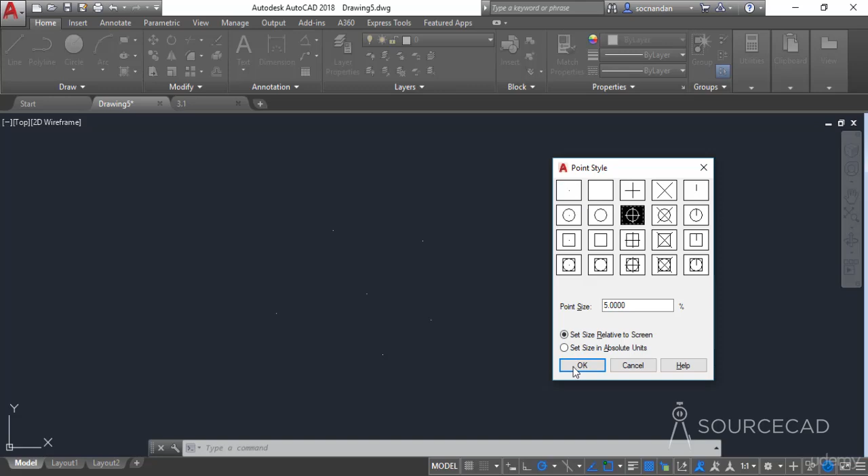Now we have a couple of points here in the drawing area, but they are very small, almost the size of a single pixel, and not clearly visible. In order to make them visible, you can change their style or type using the PTYPE command. Let's type PTYPE on the command line and press enter. This will open the point style window, from where you can change the type of point. Currently we have the single pixel type selected. Let's change it to this one and click OK. Don't change any other variable, simply click OK. Now here we have the different point styles, and they are quite visible.

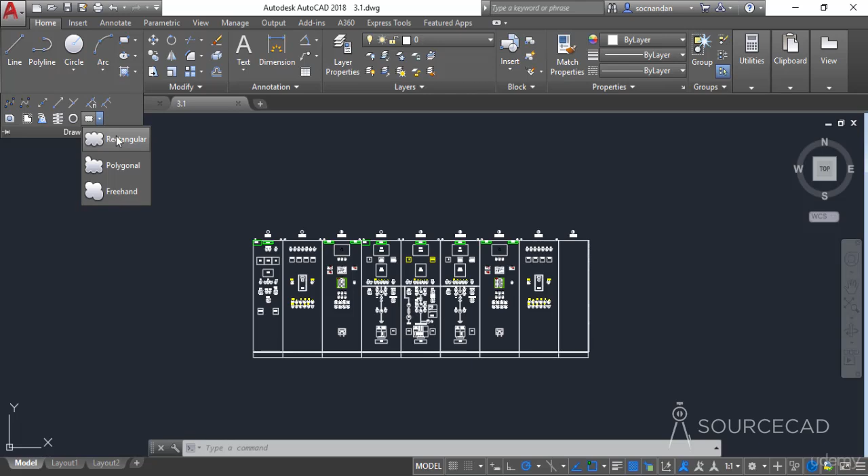Let's now move to revision clouds. Revision clouds are geometries used in the drawing to indicate revision areas. In AutoCAD, you can make a revision cloud in a couple of different ways. Here we have the rectangular, the polygonal, and the freehand revision cloud. You can use any of these options. I'll start with the rectangular revision cloud.

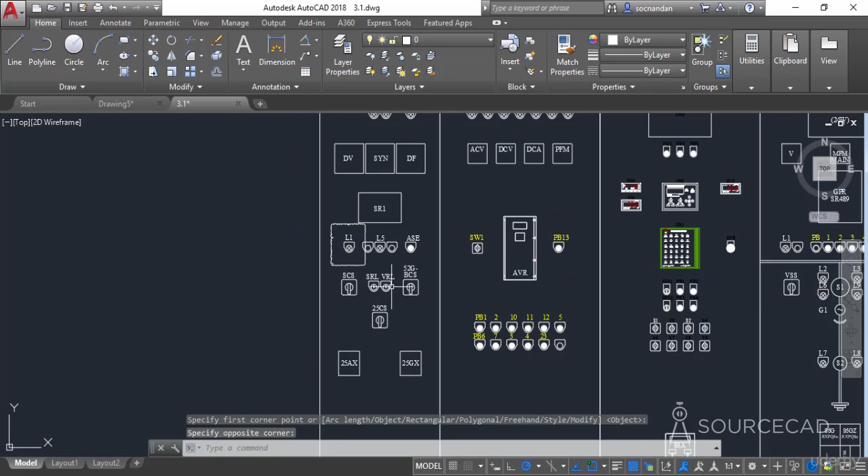Let's select it. Now let's say we want to make a revision cloud over this area of the drawing. I'll click at this point and make a simple revision cloud just like this. So now we have this revision cloud, although the arcs are very small, which we'll also take care of. After adding the revision cloud, you can add any note. In this case, the arc length is very small, so we need to modify it.

Let's do this with another revision cloud. I'll click on this draw panel to expand it, select the revision cloud, and now look at the command line. Here we have an option of arc length. Let's select it. The minimum length of arc is set to 0.5, so let's change this value to 2 units, and specify the maximum value as 5, then press enter.

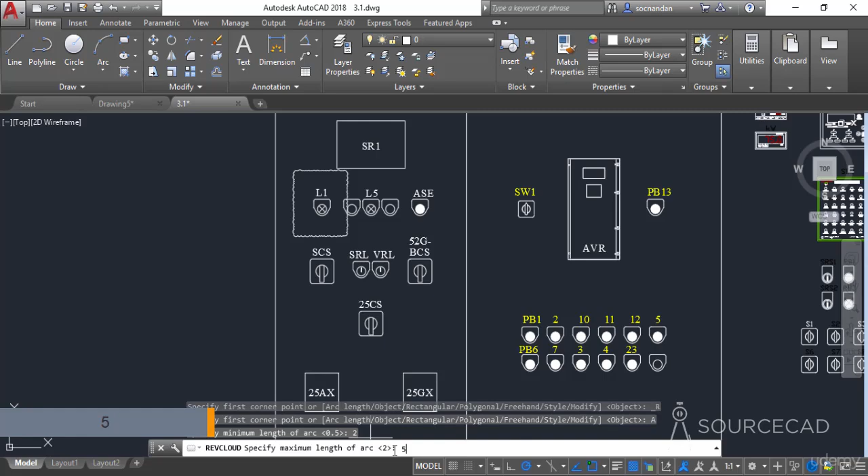Now we'll make another revision cloud. Let's click at this point, and now you can see the clear difference. The arcs in this revision cloud are quite visible, with the minimum size of the arc at 2 units and the maximum size at 5 units, as we specified.

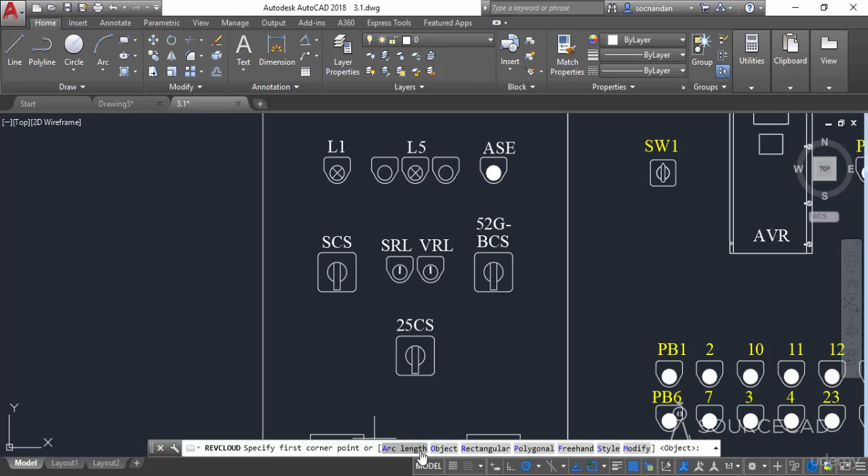Let's now erase both of these revision clouds and look at other options of revision cloud. I'll go to the draw panel again and select the same revision cloud option. Now here we have some other options. For example, we have the rectangular, which we've already seen, and we also have a polygonal revision cloud. Let's select this polygonal.

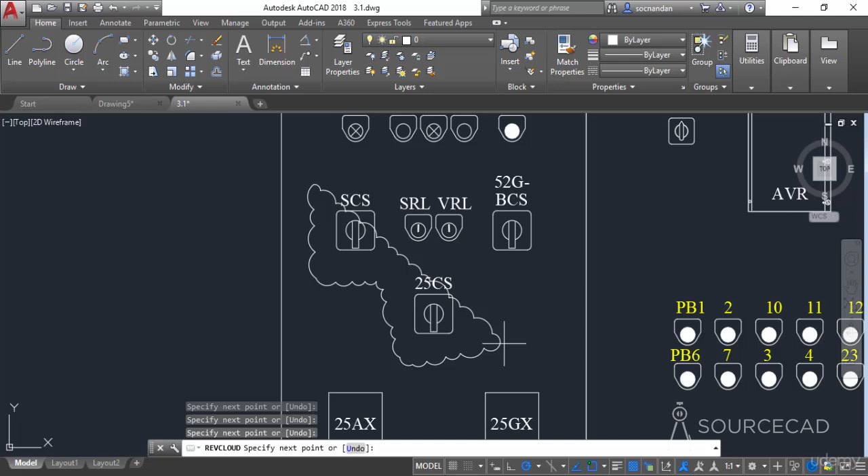Now let's assume we want to include this object and this object in our revision cloud. For that, we can make a polygon just like this. Click at a point here, now click at this point, then this point, to make a revision cloud that includes only these two objects. In this way we can make the revision cloud. Now press enter, and here we have the final revision cloud.

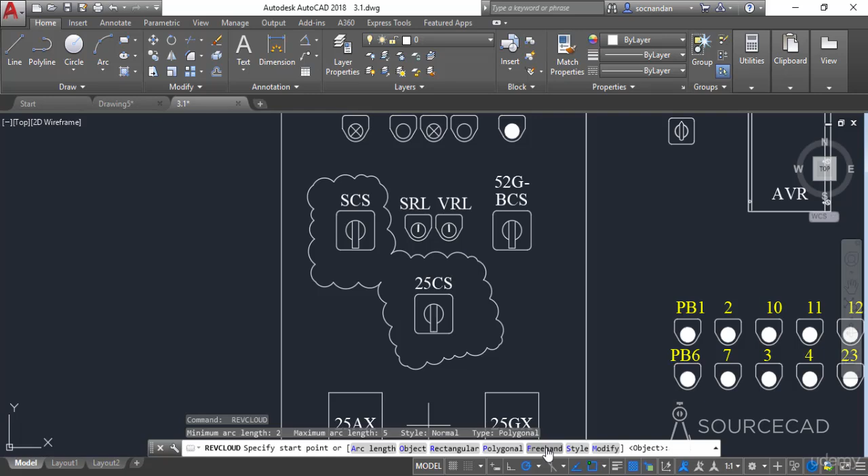We also have one more type of revision cloud, the freehand revision cloud. Let's press enter to repeat the revision cloud command. You can also go to the draw panel and repeat the command, but the quick way is simply pressing enter or the space bar to repeat the last command. We've already seen the polygonal, so let's look at the freehand. In this case, you can make a freehand sketch, click at a point to start the cloud, and make a sketch just like this. When you reach the starting point, the cloud will automatically finish and a completely closed loop will be formed just like this.

You can also change the type of revision cloud using the same option. Let's press enter, and now here we have a style option. Let's click on style. We've already selected normal, and these are the normal revision clouds. Let's select calligraphy, and here we have a different kind of revision cloud, the calligraphy type.

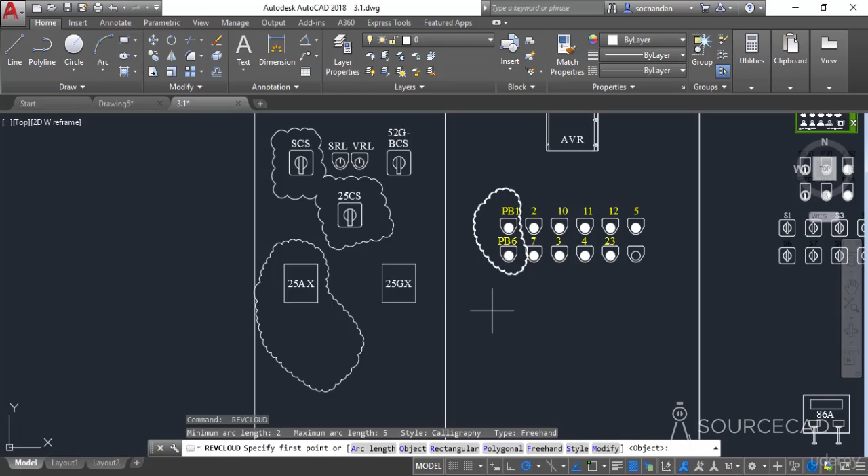Let's press enter again and select the modify option. Using this modify option, you can modify any existing revision cloud. For example, let's assume we want to include these two objects as well in our revision cloud. For that, I'll select modify, and now select the polyline we want to modify. This is the revision cloud we want to modify, and revision clouds are made up of polylines. I'll click on this revision cloud, and now let's start making another one.

I'll click at this point, and then I'll click at this point. Now we have included both of these, but we also need to remove this part. Simply click on this part and it will be removed. Now we have it perfectly in order and don't want any more changes, so simply press enter, and here we have the final revision cloud.

So in this way you can make many different kinds of revision clouds in AutoCAD, and you can even modify them and change their type.